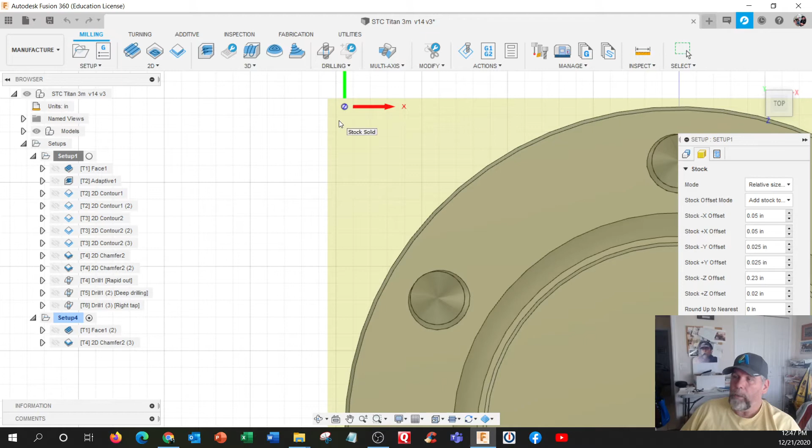The length, which is this way, is going to be determined by the saw. And in the instructions on setup, let me just flip this around. They're telling you to shift this coordinate 25 this way and 50 thousandths that way. So if this is cut to 2-inch and this is like 1.950, you may not get all material cut. So just pay attention to that part.

And we make sure we name it, well, I didn't do it on mine. I labeled my program 1001, and I'm going to get this done while I'm here. Titan 3M, Op1, and my initials. All right, hit OK.

All right, if it flips upside down, notice the dot is here. I already have 2 setups. It's like the home view.

All right, got the face mill, and we should be using our Titan building block, the STC building block tool. So if I go to here, I can see right here, these are the old tools. I haven't upgraded mine, but I could do that by pulling the tools out of here.

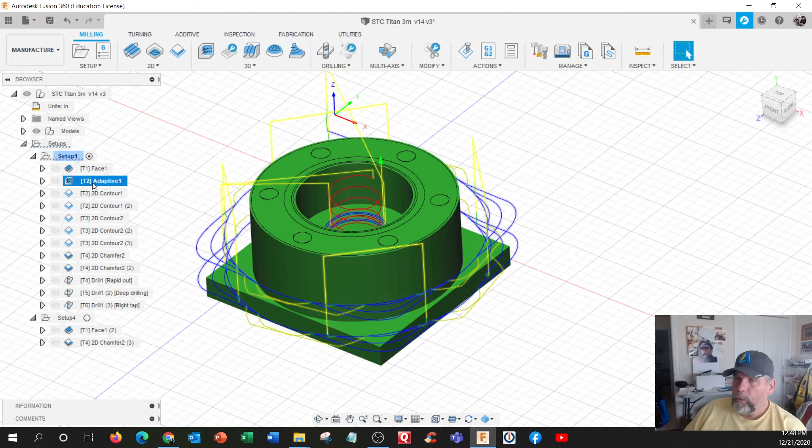We'll actually have better preset data, but we'll get up to date with that. So on this one, we got the typical face mill top, right? Then we have adaptive going around the outside. And I see this one's got 2 levels. Usually you could do this in 1 level. What I mean by that is...

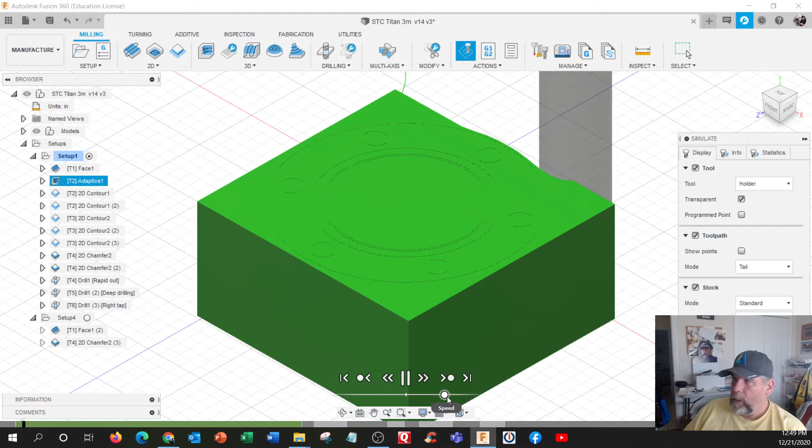See if I can demonstrate this. I'm going to simulate, so this is the face mill. And then we have this sideways cut. So notice it's not all the way down. So we should be able to cut at full depth. This will work fine, it just takes longer.

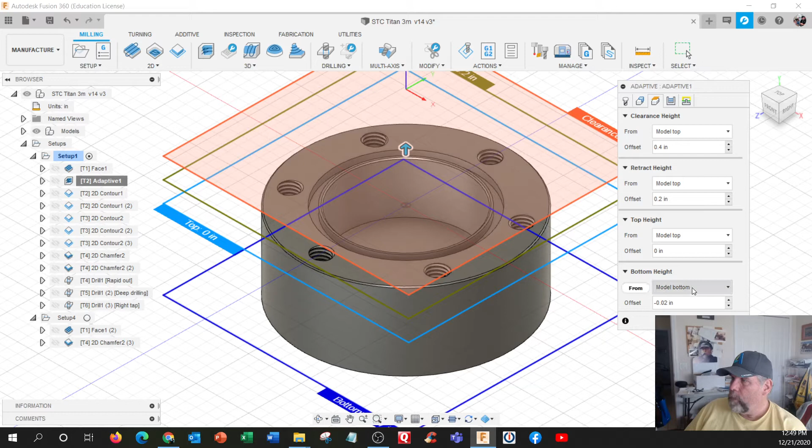All right, so some settings in here. I'll see if I can improve this. And I'm going to put in rest machining and stock contours, everything model top. It says model bottom minus 20, and passes. Optimal load is the sideways cutting, that's got nothing to do with the depth.

And we got machine cavities, which would be the inside. Slot clearing, climb, maximum step, this is one you want to change right here, maximum roughing step down, let's make that 0.8. All right, I'm just going to shrink this up so I can hit the OK button. Let it regenerate, and now it does a full depth cut.

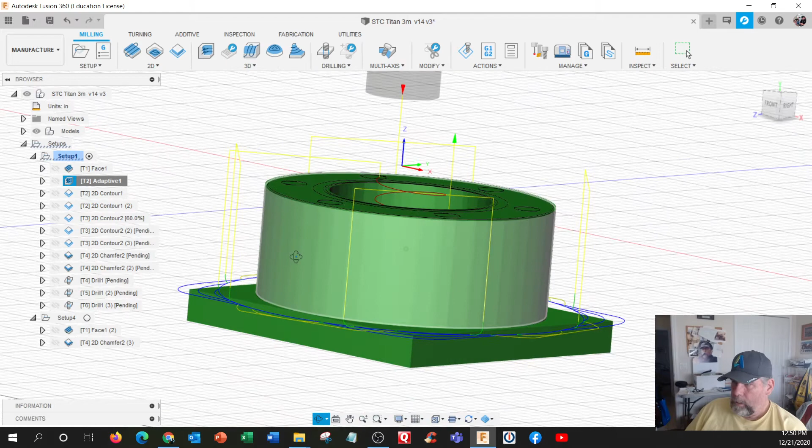Okay. So then you got that. You have the contour milling, this is doing the inside, and the tool is big enough that you really don't have to do a pocket like the bigger parts. If it was bigger, we might have to do a pocket to make a nice floor and then do the contour for the walls.

This one here is contour outside, you can see right there the tool path. And let's hit contour. Now this is the little tiny tool, the 1/16 flat end mill. This little tiny tool is flat on the bottom.

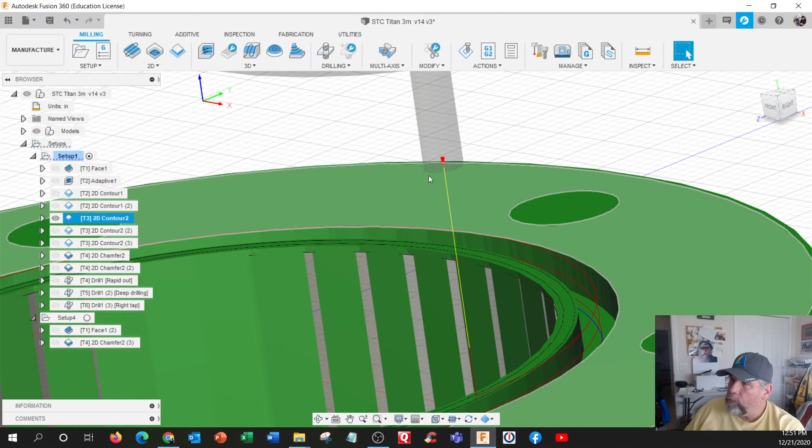And we're going to use something, it's like spiraling down at the same time. Let's go check that setting. Edit, and we pick the contour. So notice we're picking the blue line right there. And we get the height set.

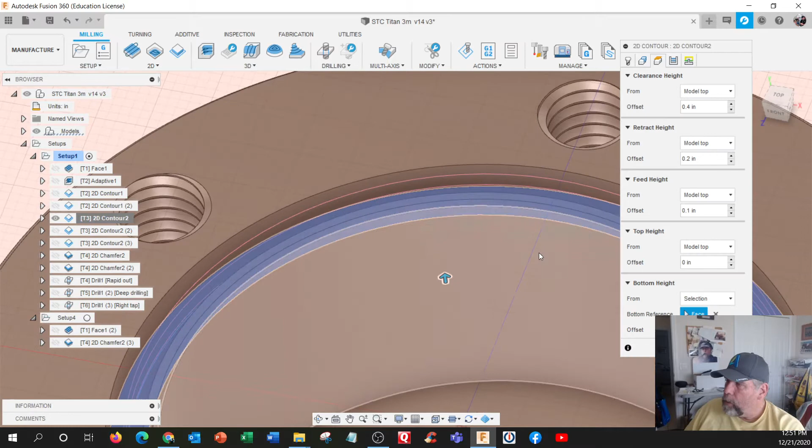And this one says selection bottom, and this is the face on the bottom with no additional offset. And on this one we have stock to leave, but we're using very small numbers because this groove is almost the size of the tool. So we don't have a lot of room on either side.

Alright. And let's look at this other one. Yeah, now we're doing ramp, but we're doing ramp but not as spiraling down the middle. We're ramping but staying in the middle of the slot. So we're changing our angle of attack.

So if you did 2 degrees, it would probably take a long time to get down there, but 30 degrees seems to be a pretty good one. And they actually have a maximum step down, so that's like a protection right there. So it's going to spiral down the middle. But you also have to shrink up the lead in and lead outs because you don't have a lot of room.

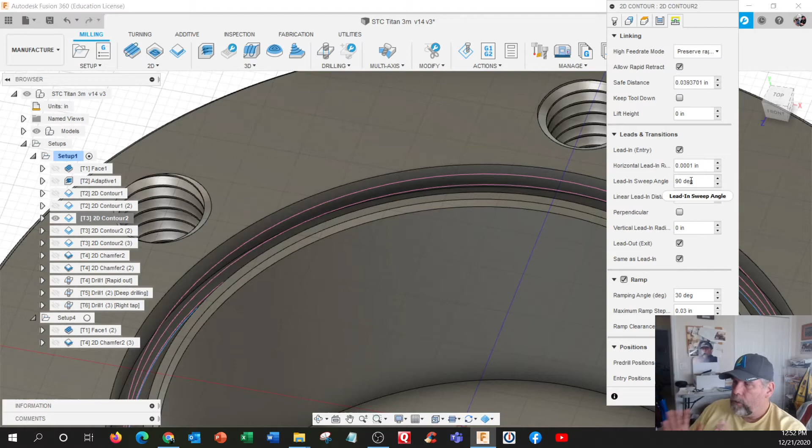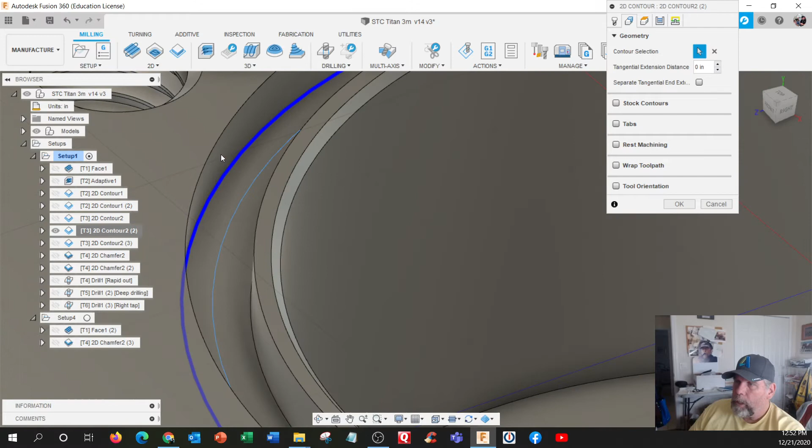All right. Then you have the two that actually finish the walls. Alright, let's pick geometry on that one. So we're picking this bottom corner right there. So we're machining this wall right there. And let me get the top view here. Top view. I'm just going to go back in and edit. You can see a little bit clearer here.

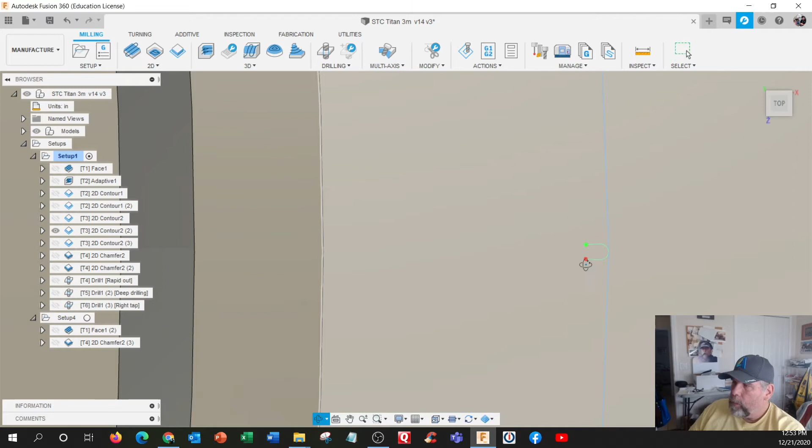So if you look at this, you notice this is very, very small right there. That's what we call our lead in, lead out. One would be an entry position. I think it'd be a down arrow. There it is. This is going down. You've already cleared it out with that spiral ramp. And it's going to land on the floor. And it's going to actually curve in and then start following that contour. And when it comes out, it'll be back to this intersection and it'll curl out and pull out of there. So that would finish one wall, and then we'll go back and finish the other wall.

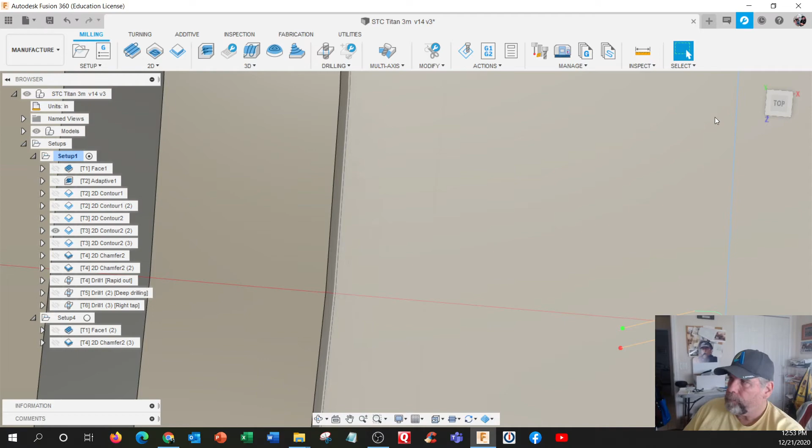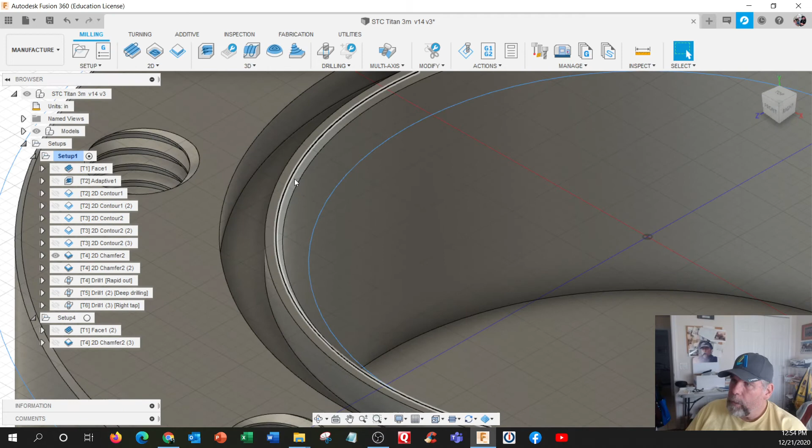Okay, so this second one is really a duplicate of the first, only it's the inside wall, that little wall right there. And then we got to do chamfering, but this chamfering is pretty simple on the outside and the inside. You can see it right there. You got a big chamfer, big chamfer. This one's actually just going to barely take off the sharp edge of these two corners here. So that would be the second one. And that one you got to play with the numbers a little bit.

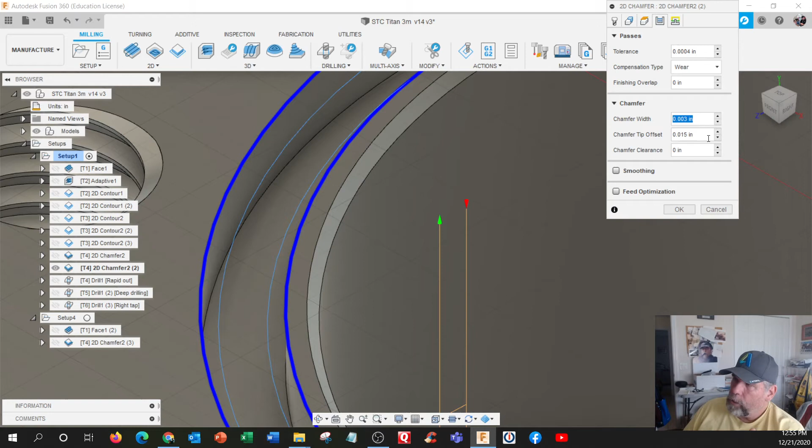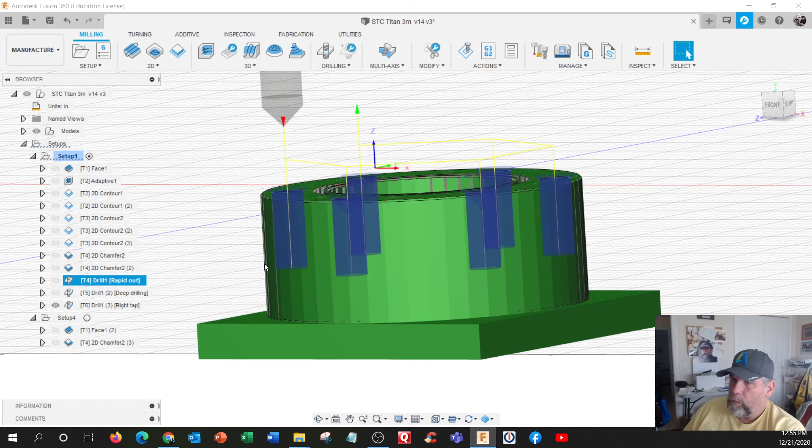Got contour selection, you got your heights, model top, chamfer width, 3/1000ths only. We really don't have a designed chamfer on here, so we just want it to barely touch, and we're controlling how deep we go with the 15/1000ths. That's the tip offset, and this is the picture of how far down it goes. So we're working in a tight area. Then we're going to do our standard spot drilling, which is the drill rapid out, deep hole drilling, and the taps, which should be not as deep as the drills. Then we're going to flip it over and do side 2. Only side 2 is going to be the center of this part.

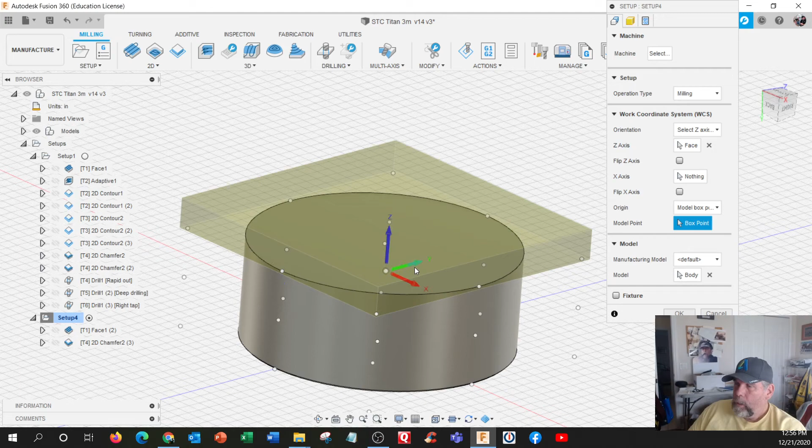We shut that one off. So in our setup, edit, stock, we're going to do model, where am I here? Model box point, but we're going to actually pick the center. Well, origin, it's wrong. Box point, and yeah, there they are. Right there, and I got to get the Z to go up. Z-axis. There it goes. And let's just flip X, because I have the wrong thing selected here. Oh, there it is. Okay, model box point, that's right there. Hit OK. So now we're aligned.

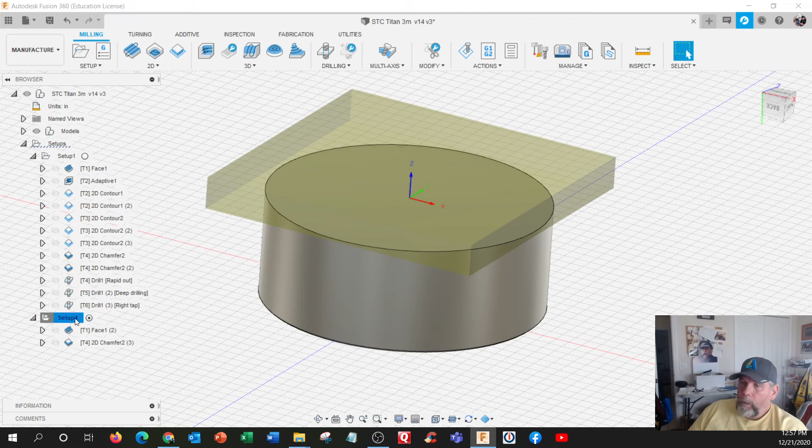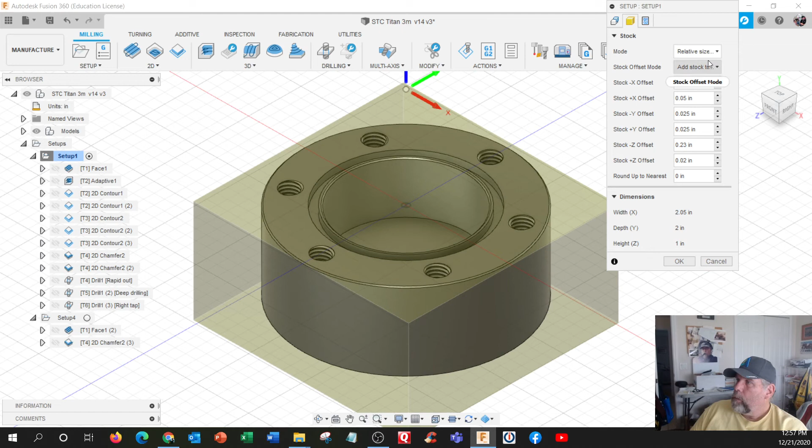So we're going to finish. The easiest way to do it is the center of this is going to be our X and Y, and the Z0 will be the top of the finished object. And we'll use our old part setup trick of stealing from the first operation. It says 2.05, so I believe that's actually 0.025. Let me go actually look at operation 1. Edit. Setup. Oh, here it is. Relative stock size 50, 50, 25, 25. Okay. Which means relative size box and add stock to all sides.

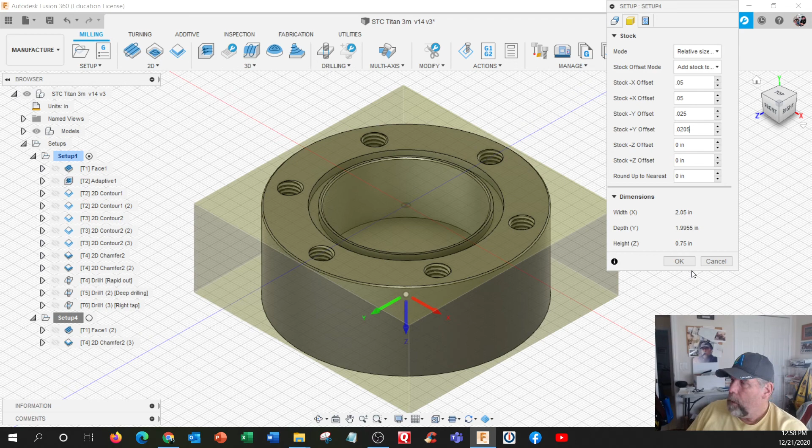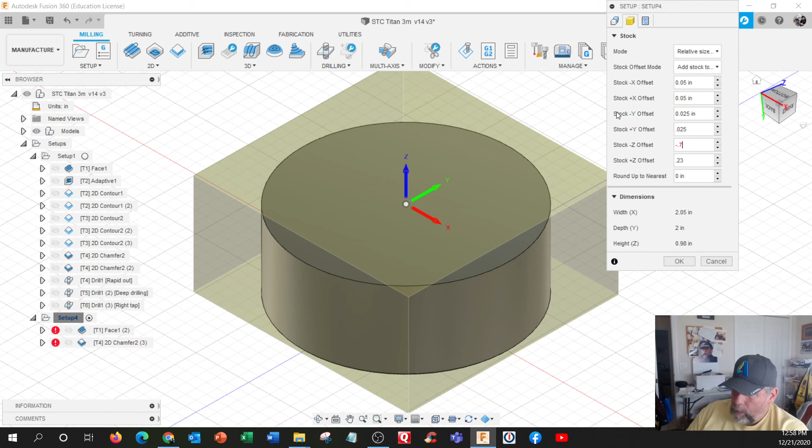We do this one. Relative size box, add stock to all sides, and we got the 50, 50, 0.025, 0.025. Just gonna okay for a second. Let me get this flipped upside down. Okay. Go back and edit. 50, 50, 25. Oh, this one's incorrect. 0.025, and Z plus is going to be 0.23, but Z negative is going to be minus 0.75. Yeah, we got a little square on the top. And then make sure you did your offset, and we're using WCS number 2, which is equal to G55. All right, let me regenerate this one.

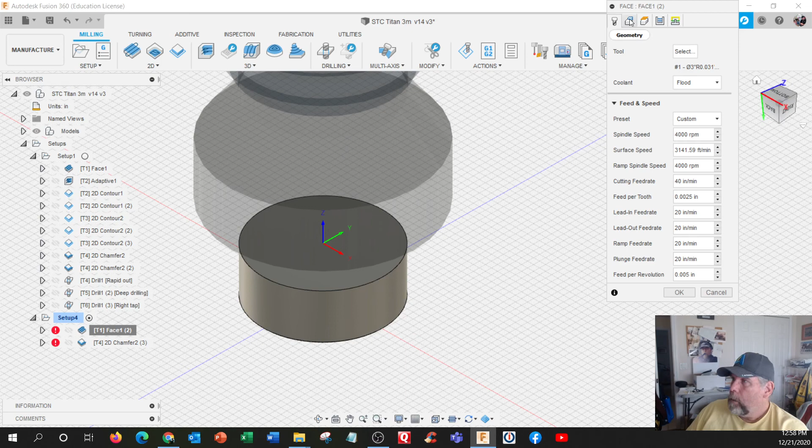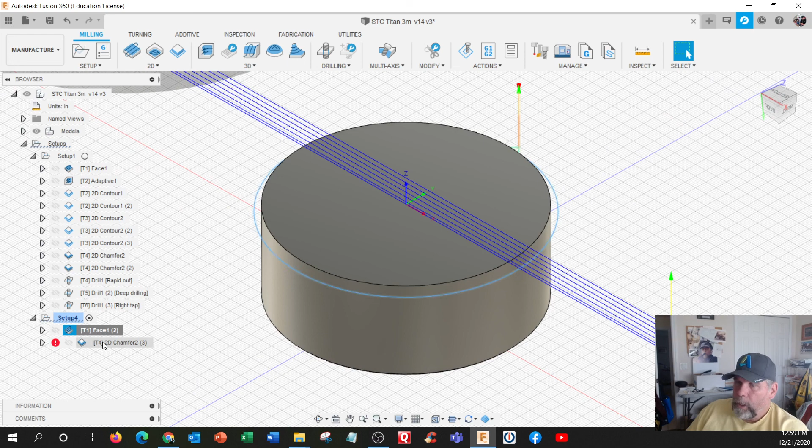We got multiple steps again. So stock selection is good. We're going to do stock top, except for the bottom has model top. We're going to do multiple depths. 40 thousandths is acceptable, and finishing step of 20. Going both ways, and extend before retract. That's our standard roughing, and so we can steal the 2 chamfering tools. And this one will be chamfer the back, which would be this ring right here. And I did not draw a chamfer, so if I don't draw a chamfer, I have to put a number here. If I have a chamfer driven, then I'll use a 0 here.

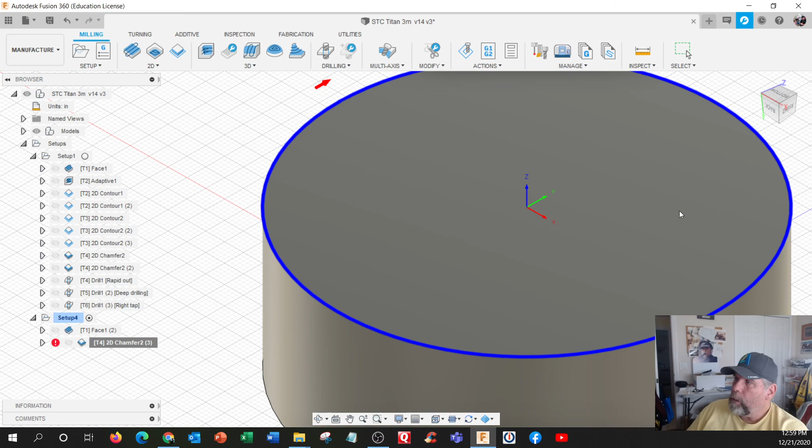Alright, and now you can choose to engrave. So I'm actually going to try to do a circular engrave next, because I haven't done that yet.